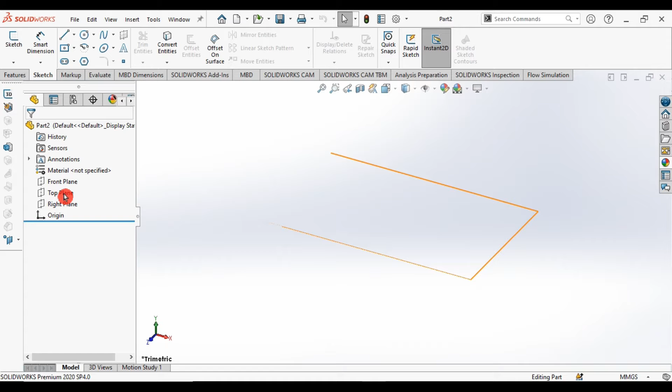Part 6. Let's start to make today's part. First, open Solidworks and open a new document. Select Sketch, then select one of your choice plane. I select top plane, and now click on Sketch.

Now first of all we have to make this part at the diameter of 40. So select the centerline circle and create a circle at the center point. Now go to Smart Dimensions and give the value of 40.

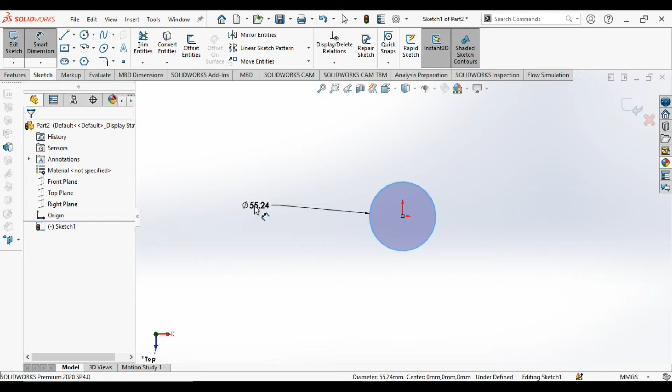Now we want to extrude this part, but we do not have the value for this. If you notice that the total length is 150, 25 is for this part and 10 is for this part, and you will get 115. So go to Features and click on Extrude Boss Base command and give the value of 115.

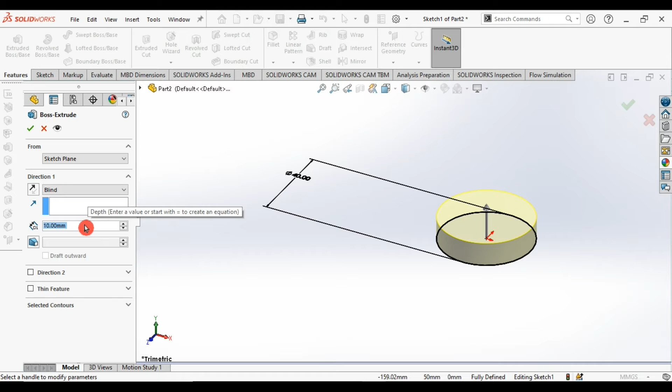Click OK. It is extruded.

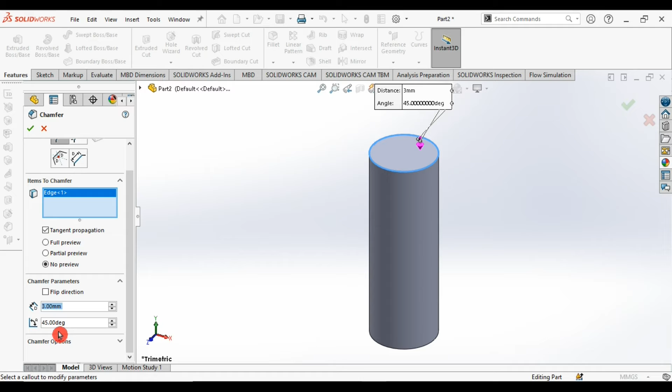Now we want to chamfer one side of this cylinder at the value of 3 at 45 degree. So let's come to this option and click on Chamfer. Select this side and give the value of 3 at 45 degree. Click OK.

Now come again to the sketch. We want to make this part now. Add the diameter of 15 and extrude it up to 25.

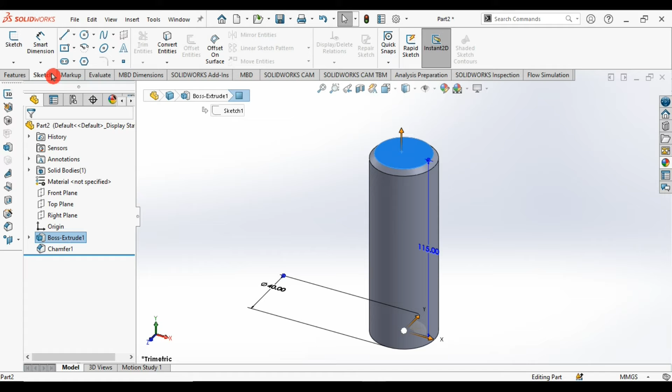Select this face, go to Sketch, and select Sketch. Make it perpendicular. Now go to Circle and select Centerline Circle. Draw this circle at the center point. Go to Smart Dimensions and give the value of 15.

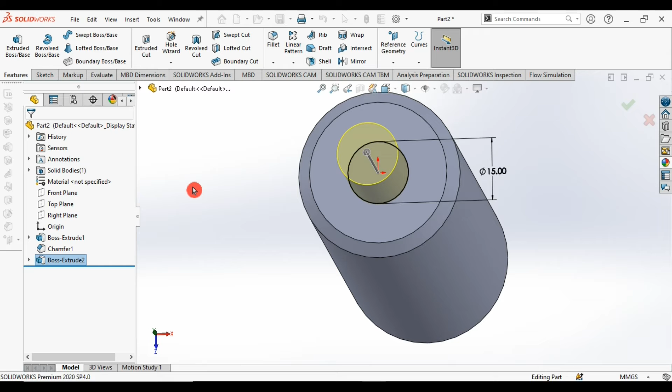Now go to Features and extrude it up to 25 like this. Look, how is it? Okay, so now select this face and make it perpendicular.

Come to the sketch. See, now we want to make this part, which is extrude and chamfer at 10 at 45 degree. But the problem is that we do not have the value or diameter for this circle.

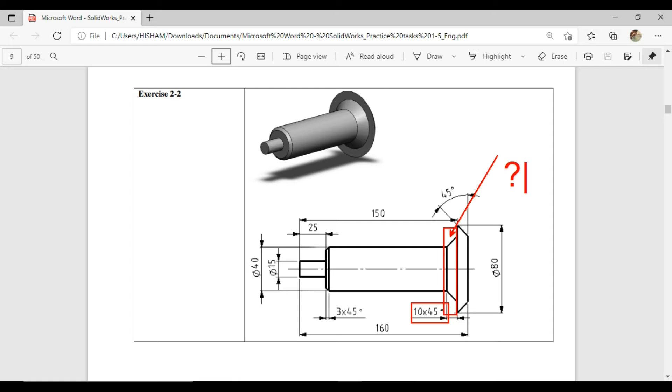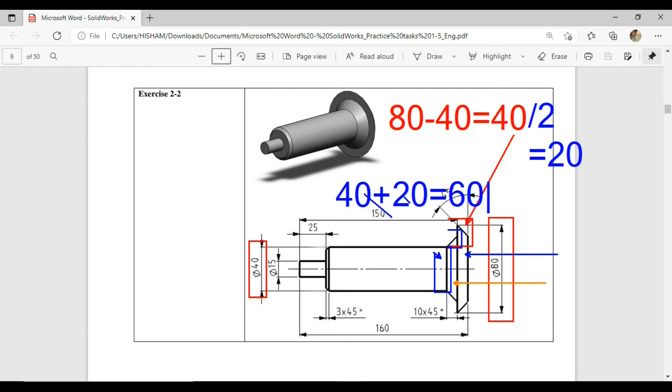So look, this outer large diameter is 80 and this diameter is 40. So 80 minus 40 is equal to 40. Now you see that there are two parts which blue and orange arrows is showing, so divide this 40 by 2, it is equal to 20. As you know that this is 40, so add 20 to this 40, it will be 60. So this diameter is 60.

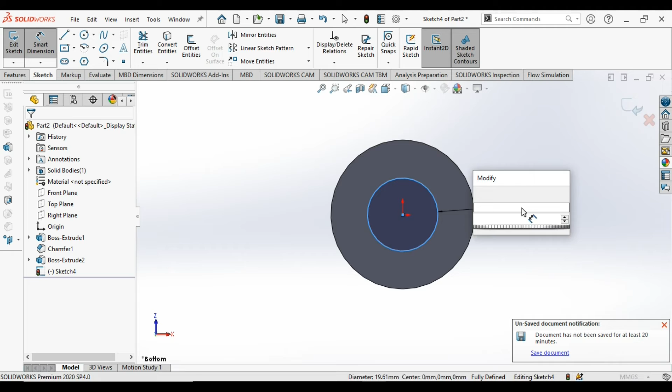Now come again to the Circle command and select Circle and draw at the center point. Go to Smart Dimensions and give the value of 60. Now extrude it up to 10 by Features. See, it is extruded.

But now we have to chamfer this portion, so go to Chamfer Command and select this edge. Now give the value of 10 at 45 degree and click OK. Now it is looking good.

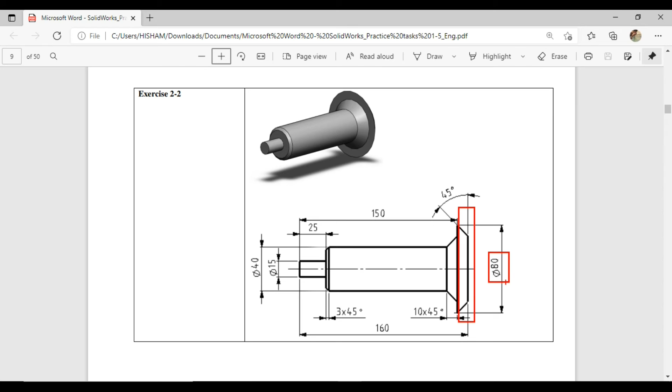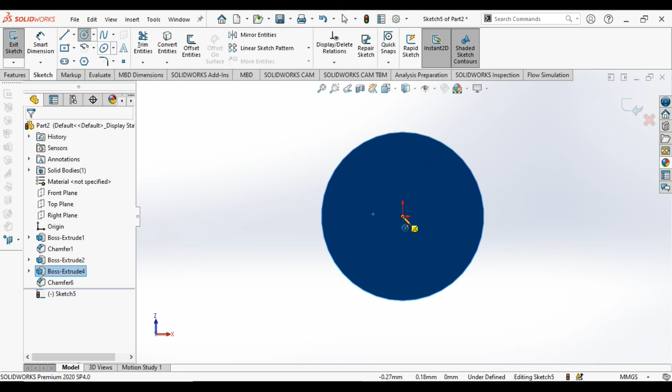Now we are going to make this portion at the diameter of 80 and also chamfer it up to 10 with 45 degree. So select this face and make it perpendicular. Now select Sketch and go to Circle and draw another circle at the center point. Now go to Smart Dimensions and give the value of 80. And again the process, go to Features and extrude it up to 10.

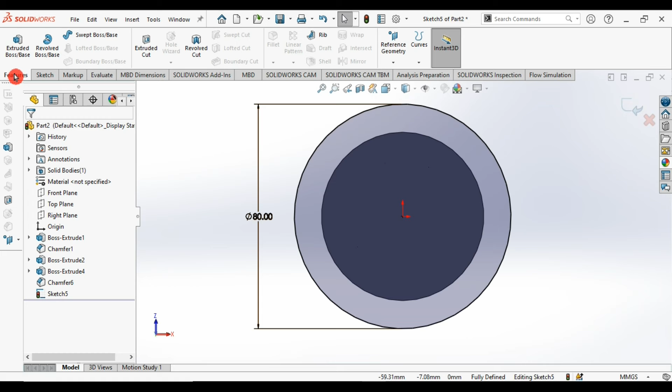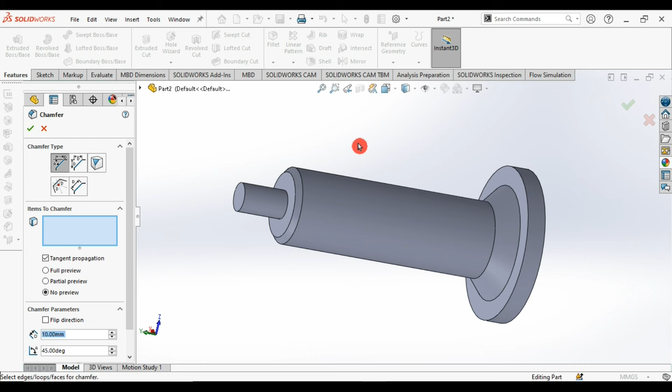Now chamfer it too, so go to Chamfer. Select this lower edge. And same the value of 10 at 45 degree as previous, click OK. See, our object is done 100%.

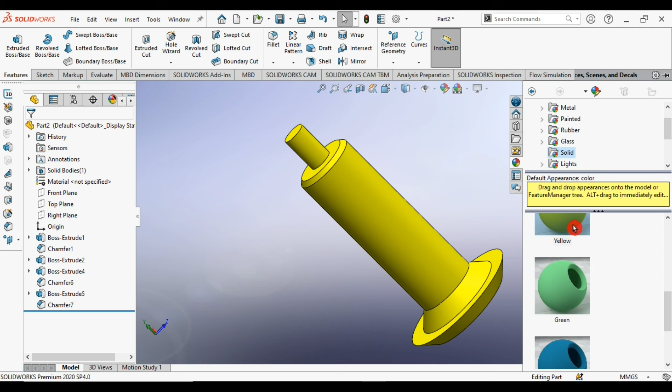Let me change its background to become attractive, and change its color whatever you like. I think it is good. So there are so many colors to choose.